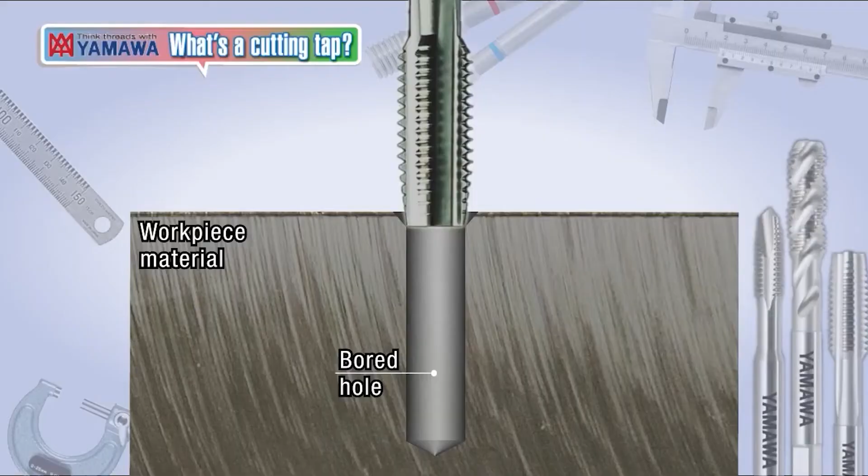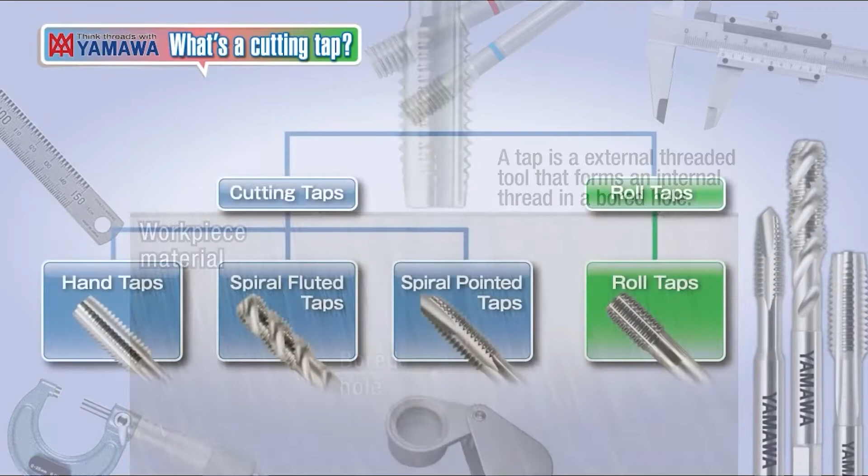A tap is an external threaded tool that forms an internal thread in the bored hole by rotating and feeding in according to the lead of the tap's thread. Taps can be broadly divided into cutting taps and roll taps. This time we will introduce you to cutting taps. The cutting tap is divided into hand taps, spiral fluted taps, and spiral pointed taps according to the shape of the flute.

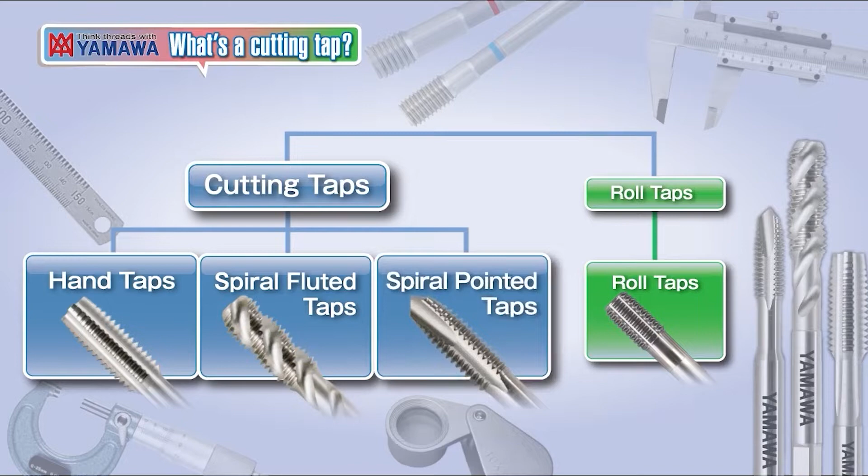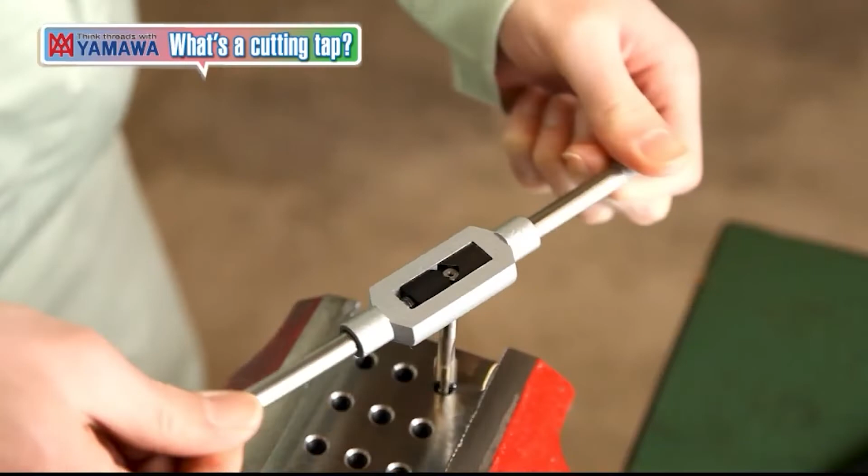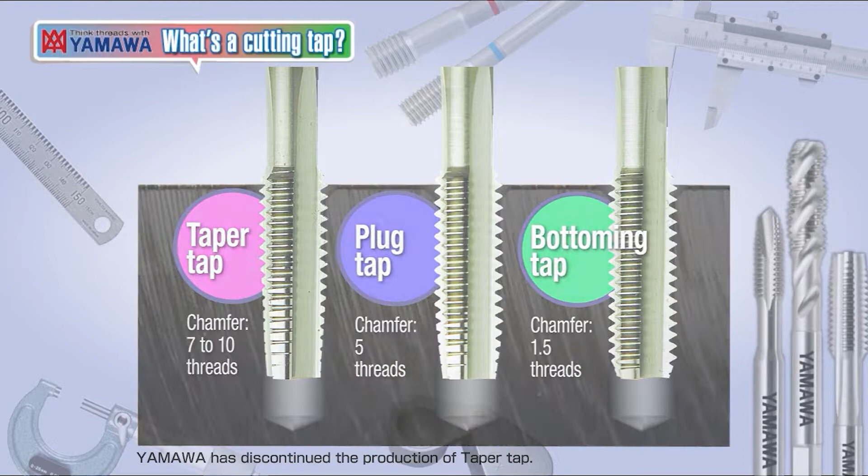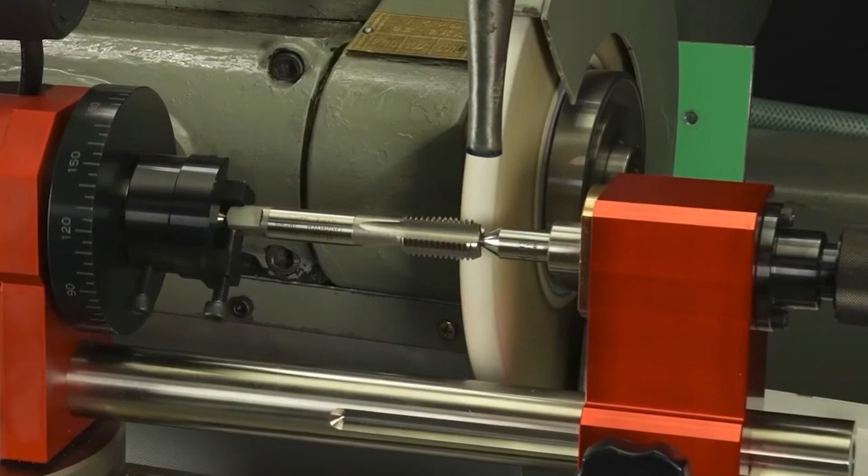So let's start with hand taps and go from there. Hand taps are characterized by their straight flutes and, as the name suggests, have a long history of being used by manually turning them by hand. Hand taps can be used for both blind holes and through holes due to their structure that stores the fine chips in the flute. There are three types of hand taps depending on the chamfer length: taper taps, plug taps, and bottoming taps. Hand taps have a very strong cutting edge, making them ideal for tapping hard materials and hard brittle castings. In addition, the straight flutes make them easier to be resharpened.

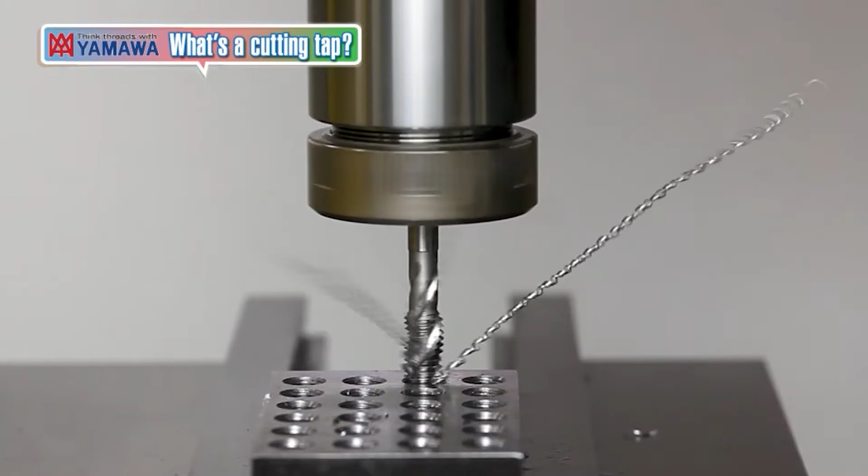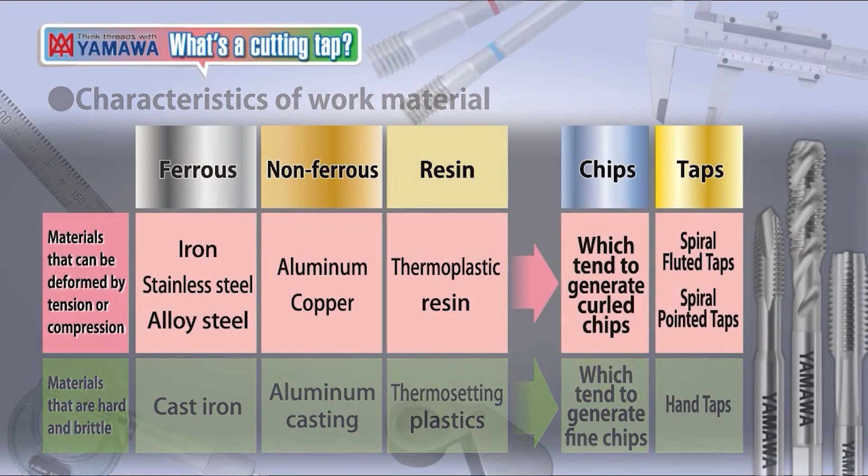As you can see, a tap with a helix flute is called a spiral fluted tap. Spiral fluted taps have helical flutes that eject the finely curled chips backwards out of the hole. This makes it suitable for tapping blind holes. Spiral fluted taps are suitable for threading sticky materials because of their sharpness.

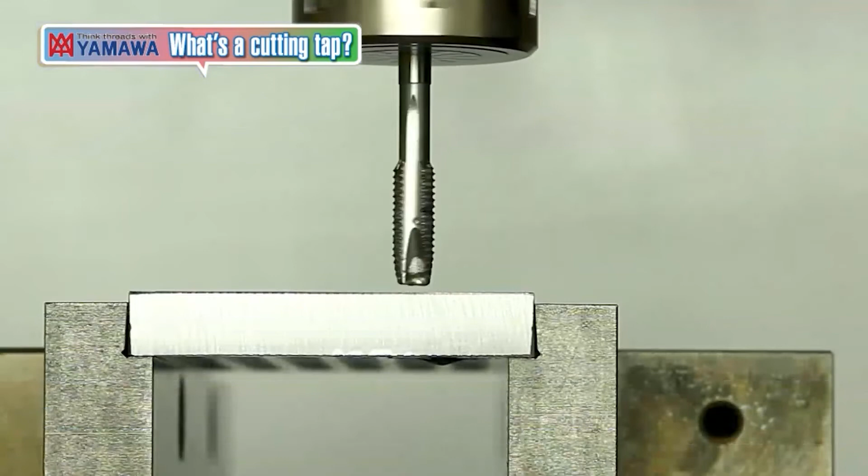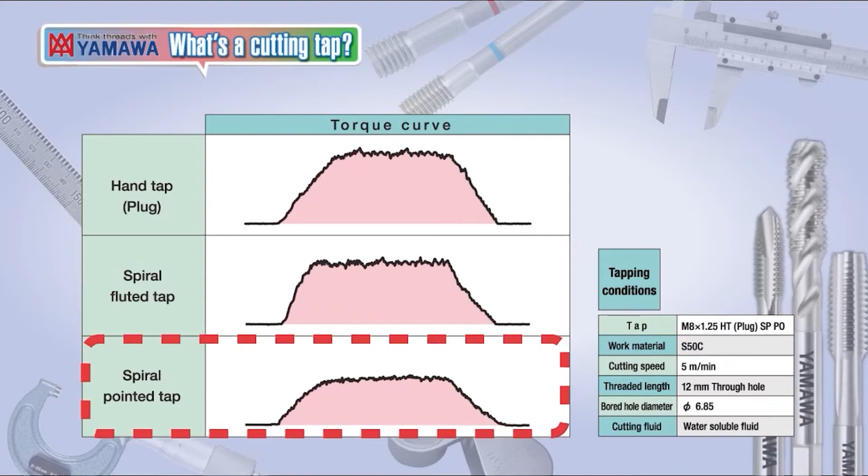A tap with additional slanted flutes, called a gun nose at the end of the tap, is called a spiral pointed tap. The chips are pushed forward and ejected at the other end of the hole. It is suitable for machining through holes because it pushes chips forward. This results in better chip evacuation, and the shallow flutes make it less prone to breakage. Spiral pointed taps have relatively low torque and can be used on machines with lower horsepower.

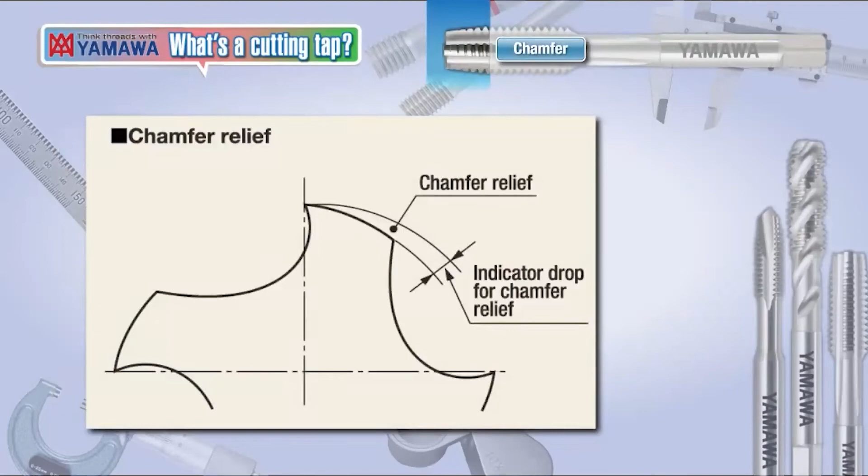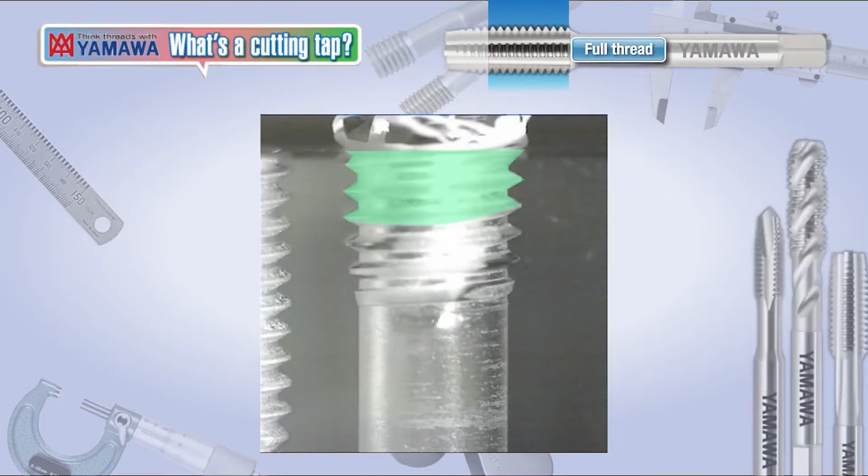This section explains the five main parts of a tap and their functions. There's the chamfer, the full threaded part, the flute, the shank, and the shank square. The chamfer is directly involved in the cutting of the internal thread as a cutting edge. The amount of material that each tooth cuts is determined by the chamfer length and the number of flutes. The full thread enters into the thread cut by the chamfered part of the tap and serves as a guide as the tap continues deeper into the hole. Generally, taps have a certain amount of true circle from the cutting edge to maintain self-guiding properties.

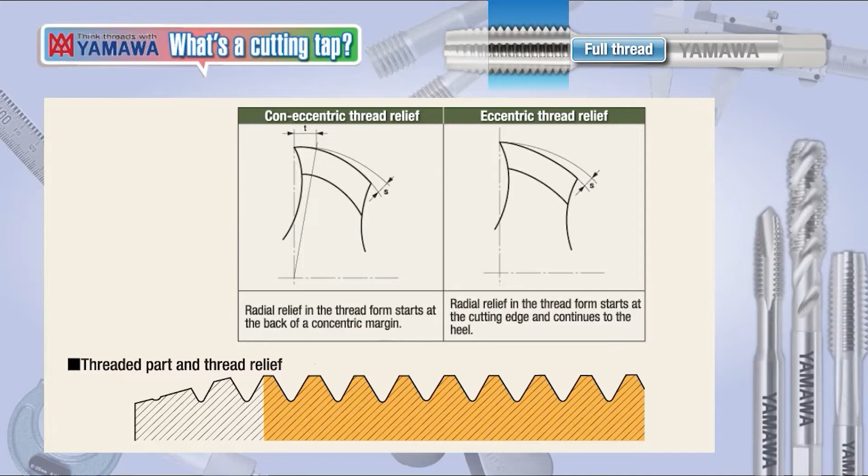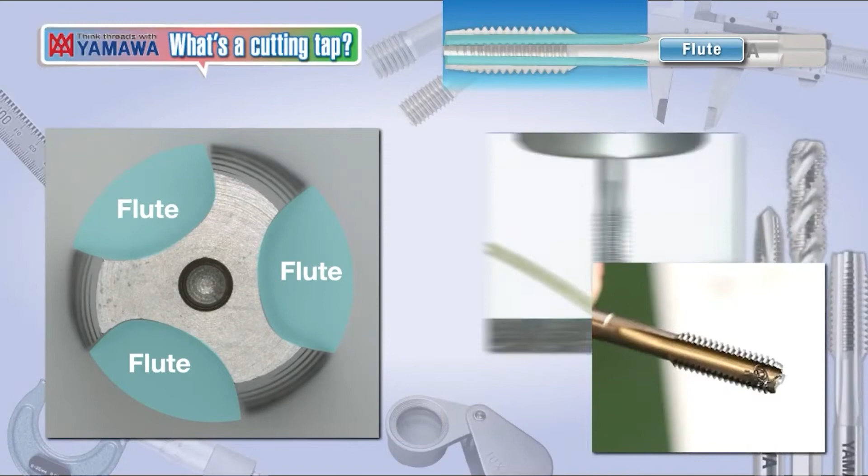The flute forms the rake angle, which is the most important part of a cutting tool. It also plays a large role in the containment or discharge of the chips and the supply of cutting fluid. The shank is responsible for holding the tap in the chuck or holder. The square on the shank serves as a stopper to prevent the tap from spinning or falling out when it is attached to the holder.

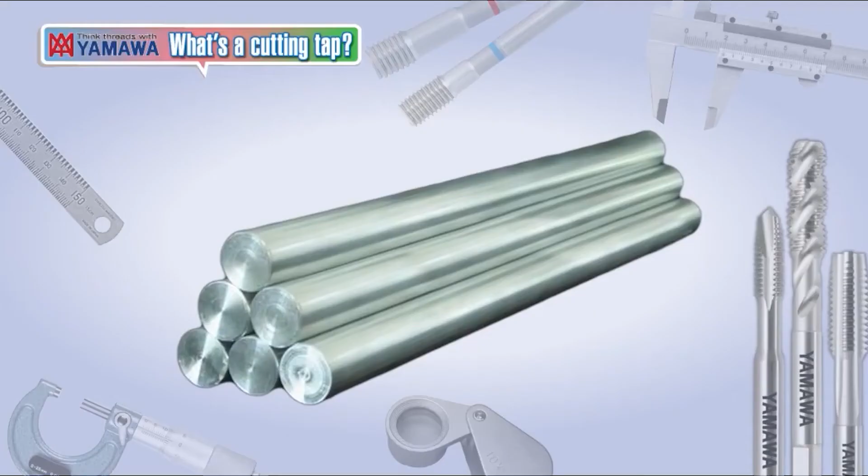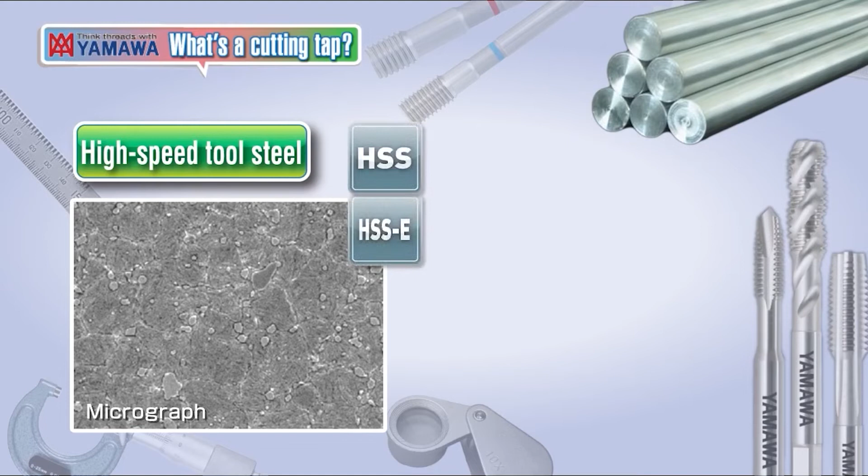Tap materials are mainly divided between high-speed tool steel and cemented carbide. Generally, taps are made of SKH51 or SKH58 equivalent of molybdenum-based high-speed tool steel. Cobalt HSS is used for high-speed cutting, and powdered HSS is used for difficult-to-cut materials. Cemented carbides are used in the machining of heat-treated hard materials, ultra-high-speed machining of aluminum and cast iron, as well as in machining that requires increased durability.

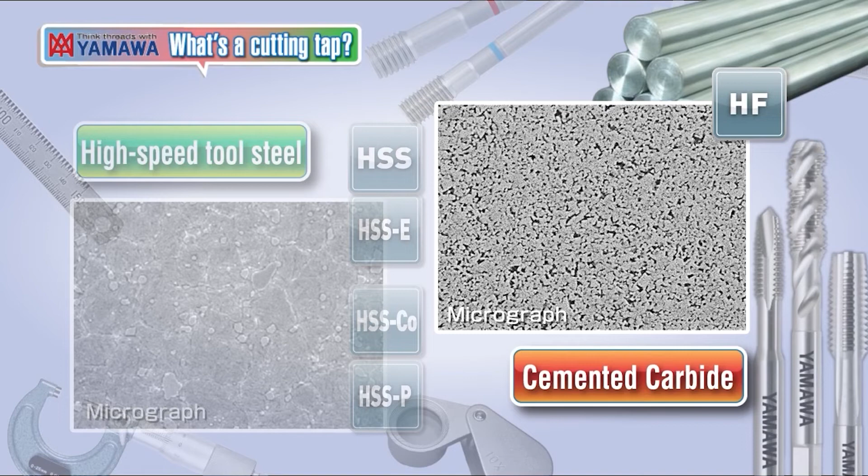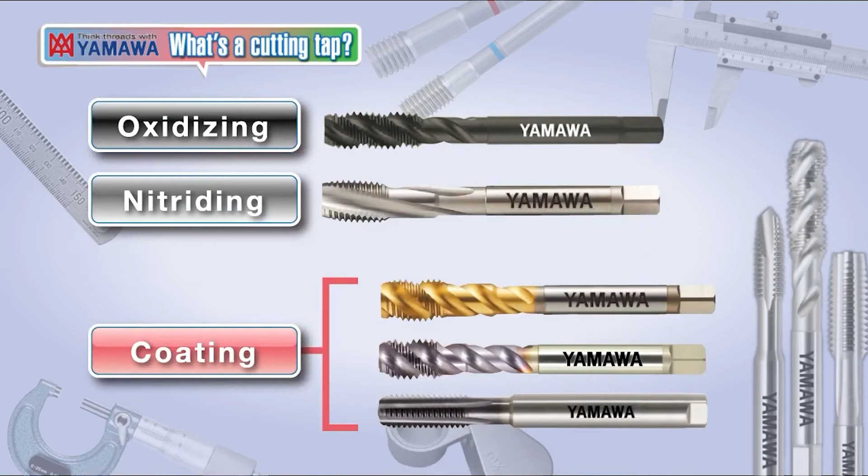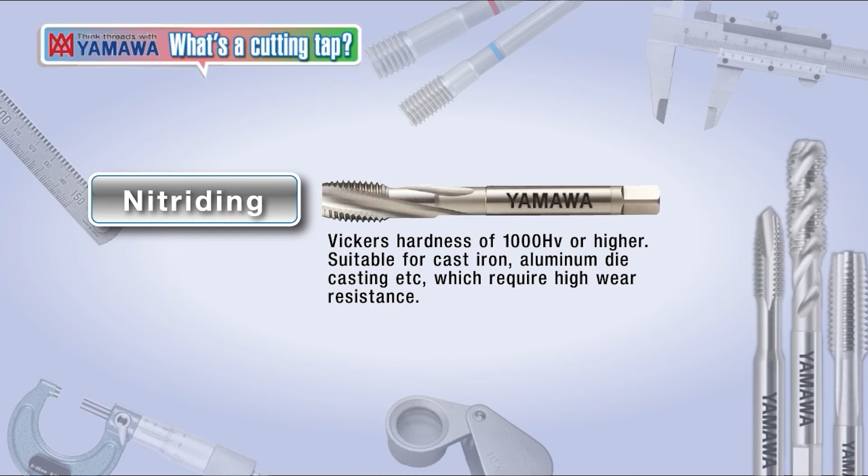Surface treatment for taps includes oxidizing, nitriding, and PVD coatings. The black-colored surface treatment is called oxidizing. The purpose of this treatment is to prevent welding of steel materials and to improve the surface finish of the internal thread surface. The grayish surface treatment is called nitriding. A hard nitriding layer of 1000 HV or more permeates the surface of the tool, making it suitable for machining cast iron, aluminum die castings, etc., where wear resistance is required. Coatings are used for high-speed machining and longer tool life. Tap coatings include TIN, TICN, TIALN coatings, and others.